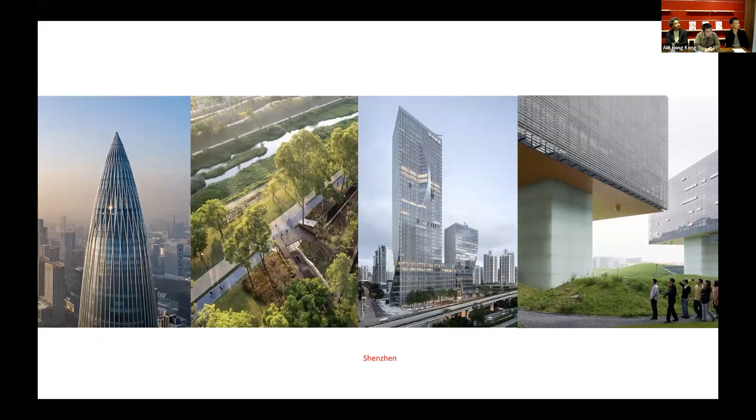However, as a very young practice, it's really hard to get those kind of high-profile projects. So we have to start from very small things: temporary structures, installations. So to prepare the lecture tonight, I put together all the projects we have completed or have in construction.

So relatively small, from very small to small. And I put them in a chronological order. It's not necessarily the case that what we are doing currently is bigger than what we were doing in the first place.

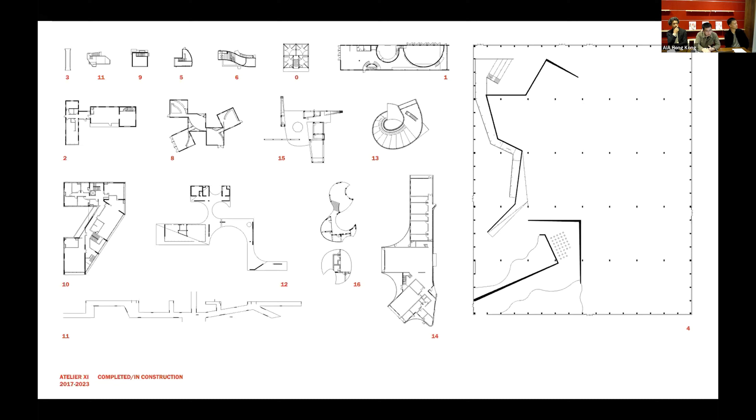I'm very grateful for this opportunity to start thinking about the hidden connection between different projects. So the first stage in Shenzhen, we started with some exhibition installations and temporary structures, thanks to the Biennale of Shenzhen, which gave us a few opportunities. I think it's still a great opportunity for young designers to start with.

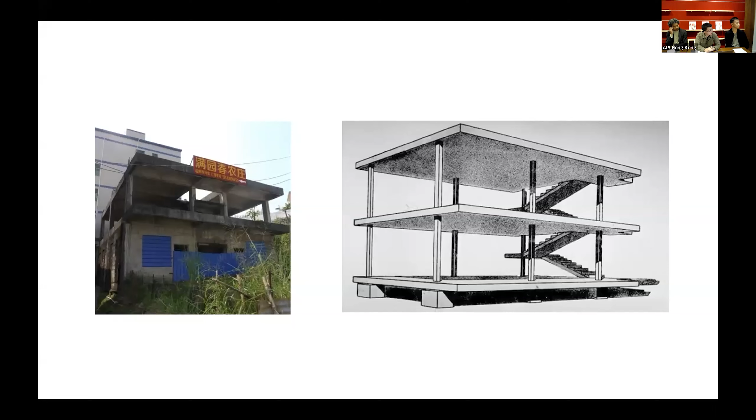The first one I'll start with is the Domino Pavilion for UABB 2017. At the time, I was full-time teaching in Shenzhen University, so it's a collaboration with Shenzhen U. The commission was to renovate a rural village house into a Biennale exhibition venue. When we went to the site, it reminded us a lot of Le Corbusier's Domino prototype. So the first idea was to retrieve the modernist prototype by taking out extra partition walls. The second idea is we wanted to add a layer of intervention by adding pivoting doors, each by the column.

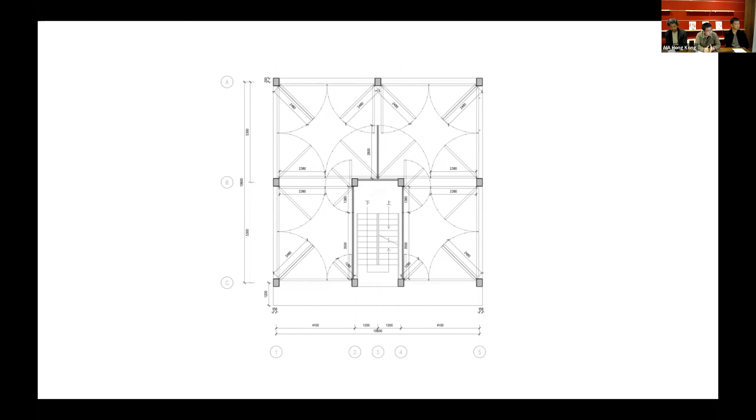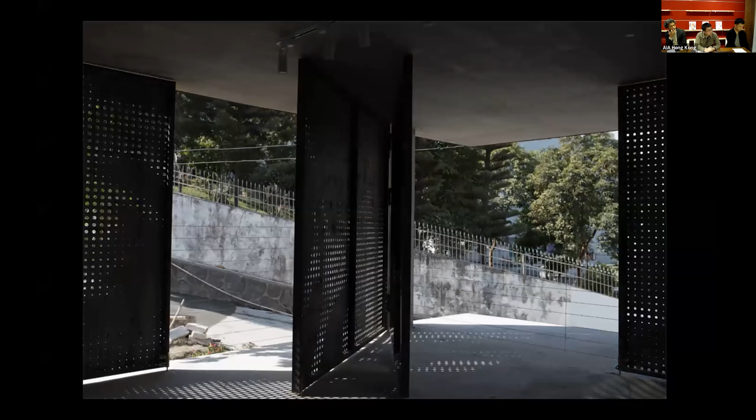In this way, the space gets flexible use depending on the status of the rotating doors. We translated that concept model into architectural drawing. Altogether for this two-story building, we have 30 big rotating doors, and they can be fully closed as a pavilion, but they can also be fully opened as a public space. This is how people experience the building - it can close and open, and the interior space can transform into something semi-exterior in this way. We also put perforation holes on the facade to let air and ventilation pass through.

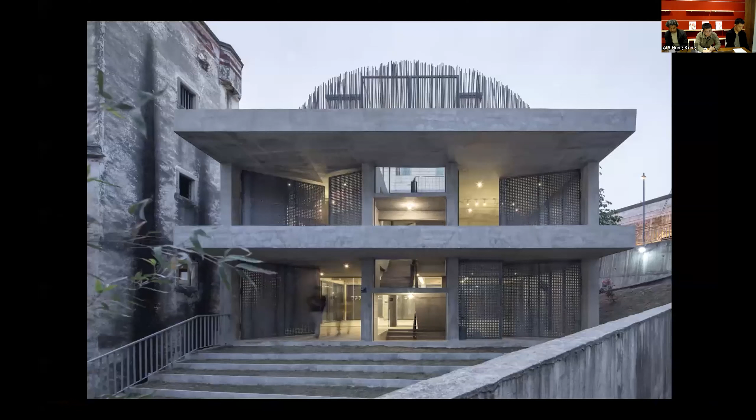At that moment, I think it was a pedagogical project for myself, because previously I never thought about opening my own company and doing practice on my own. I thought opening a company meant you needed wealthy clients, a lot of resources, and a full house of consultants and professionals. But here, there's this informal area where you can bring your idea to the local residents and work directly with contractors and workers. There's a big room for design experiment to happen.

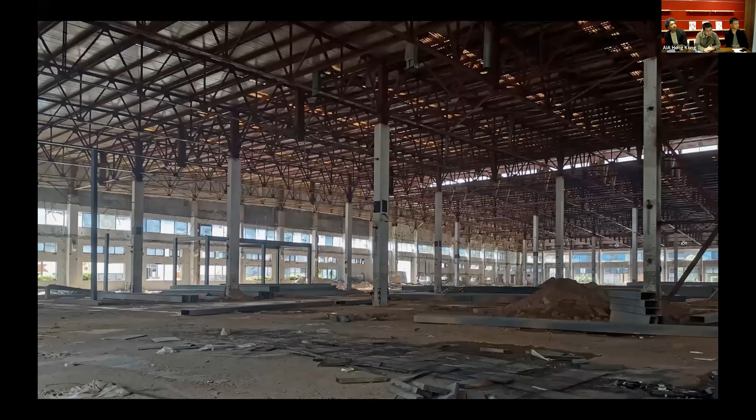So actually, I was lucky to have a sequence of exhibition projects. One was commissioned by the same client who commissioned the Domino House, two years later for UABB 2019. This time the client said we have a bigger venue - that's the good news, but the bad news is we only have two months ahead. So how can you transform this big abandoned factory of 10,000 square meters into an exhibition venue in two months?

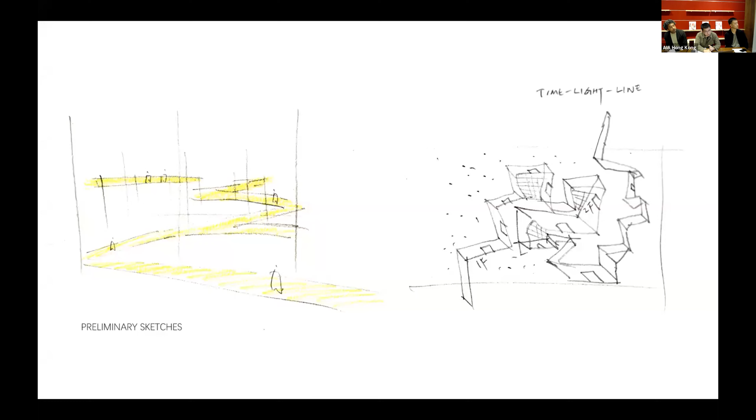We were very impressed by the existing structure, this rigid truss and column system. So we wanted to keep the existing structure as much as possible and put a layer of intervention as light as possible. The lightest medium we thought of was light itself. So we proposed a 250-meter-long light-filled wall to reshape this industrial space and give a chronological sequence for the exhibition to happen.

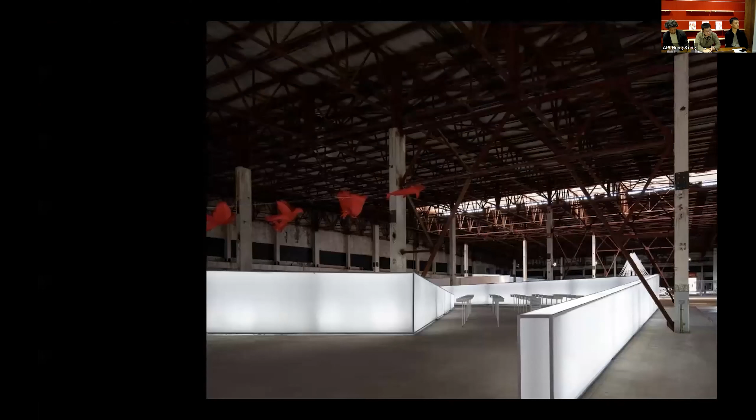In the end, it only took 20 days to finish construction - we were ahead of time. We called it the folded time light line. This light-filled membrane wall serves as a kind of foreground in this heavy industrial factory, but it also becomes the backdrop, the background, for a lot of exhibitions and artwork to happen.

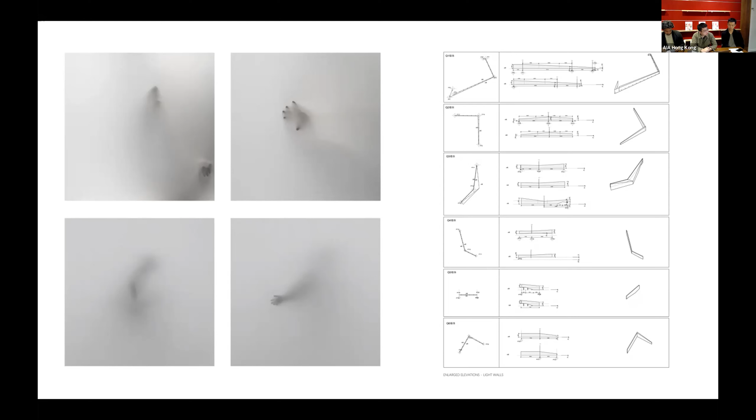So the challenge was how we could do the construction. We used a key material that's very foldable - the membrane wall can stretch 50 meters long with no seam, and labor with no professional skills can do the construction fairly easily. We're very happy this project not only fulfilled the client's requirements but established a dialogue between the existing heavy framework and the newly added light structure. We think this dialogue is precious and influential to some of our later works.

So the next stage, we started to have a few new constructions. In the beginning, it wasn't in Shenzhen, and later we came back with some experience from the rural villages. The first stop we came to was Xiuwu, in central China, and the first commission was to do a 300 square meter building for the county to facilitate the county's culture and art education.

I have to thank the party official, the very young mayor of this county, who actually had a PhD degree in politics from Boston University - very bright and very ambitious about how architecture can change local art and culture education. He showed me about 10 different sites and asked me which one would be better to do this building and have the biggest impact on society.

It's really difficult to choose because each one is different. Some are up in the mountain, some in the flower field, and the locations are far away from each other, so local residents aren't able to easily get to one point. So I proposed, can we break the design brief into several small pavilions that can better serve the local community?

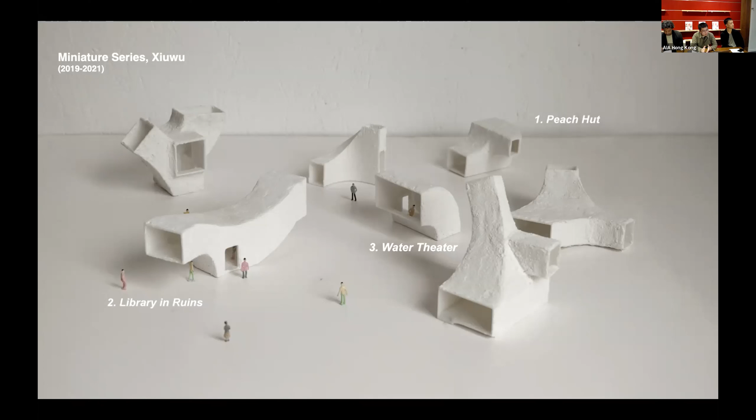Eventually we decided on 7 different pieces, developed in 2 phases. In the first phase we have the peach hut, library in ruins, and water theater, and in the second phase we'll wait for further funds to come.

In the very beginning, I wanted these buildings to be different from what the villagers see in their daily life, because I think inspiring architecture can help them rethink their local environment and space. So we designed these tree-like buildings with tentacles rising to the sky, framing the beautiful surrounding landscape, each with a different gesture relating to its surroundings.

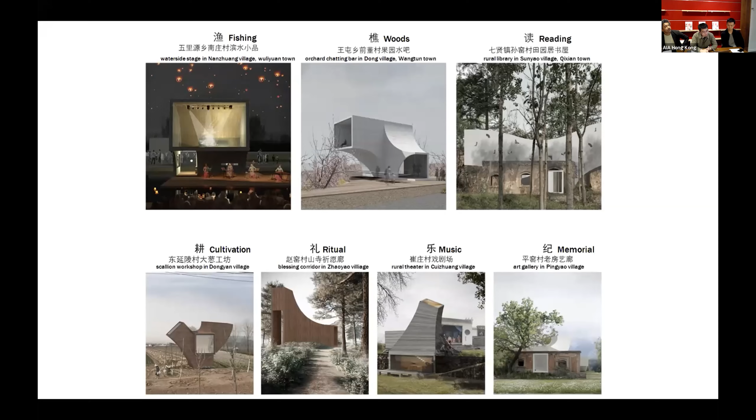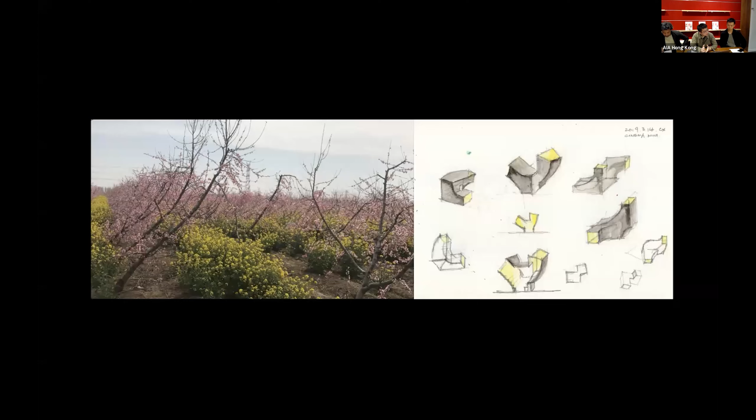The first completed one is the peach hut, located in a big peach tree farmland. The reason we chose this shape and color is that during the first site visit, I was impressed by the full peach blossoms, and it was interesting that all the trees were leaning toward one side. So we thought maybe we could design a building that rises toward the sky on one side.

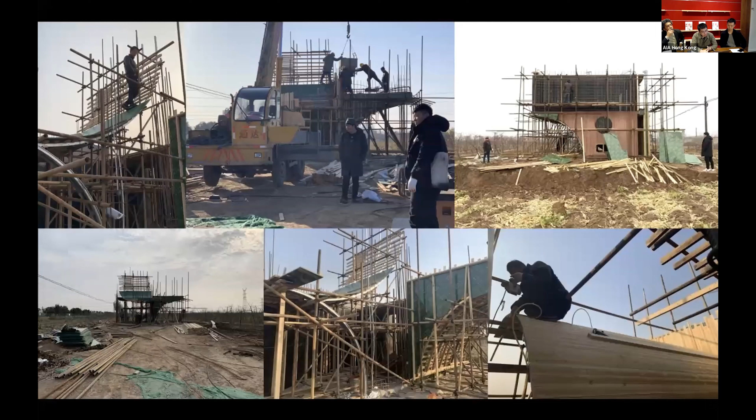After a careful study of the geometry, we developed a scheme where the building is cut through by a sequence of invisible arcs. We were quite worried the local contractor couldn't achieve this geometry well, but they managed to do it pretty well using small board-form concrete.

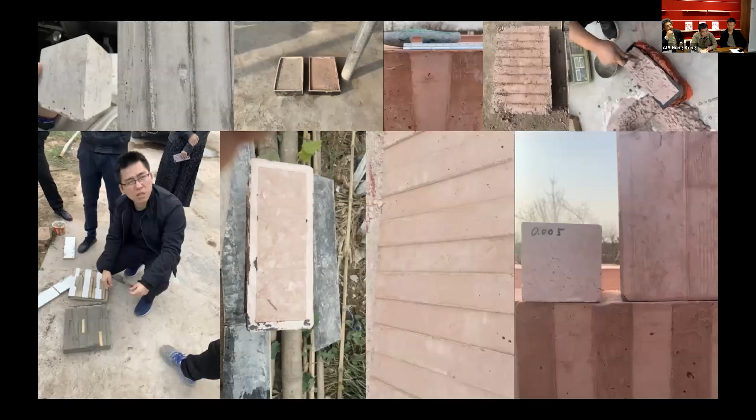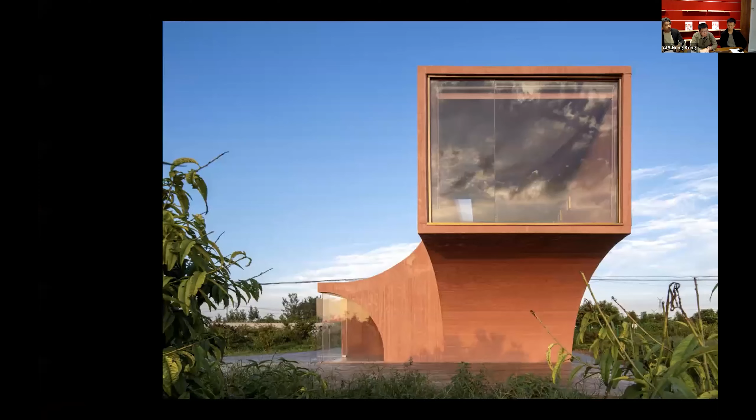Another idea was to use this pink color in memory of our first site visit. This was a pretty hard one, so we sent an architect to live there and do all the mock-ups with the team for about 4 weeks. In the end, we got the desired color and strength we wanted. That's the outcome of the construction.

The pink color of the building actually changes during the day. In the afternoon it has a warm light hue, and later in the evening it starts to have a cooler color and becomes purplish.

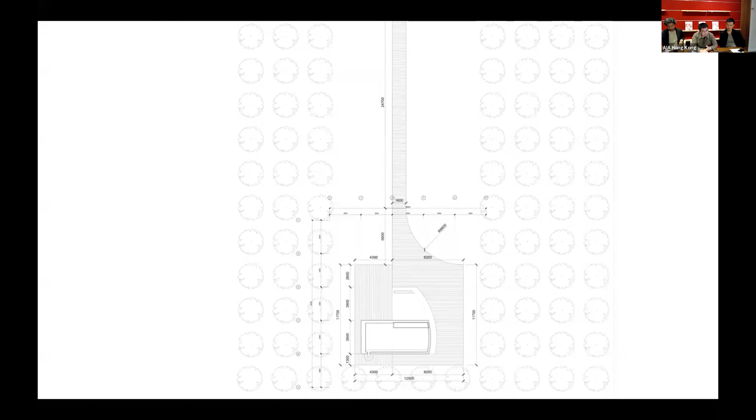We prepared a long pathway for visitors so they can go through the tree farm, with the peach hut at the end. The wooden pathway becomes wider for villager gatherings and small activities. In the end, we realized the arcade is the place they like most—they have peach tasting events and kids playing around under the arcade.

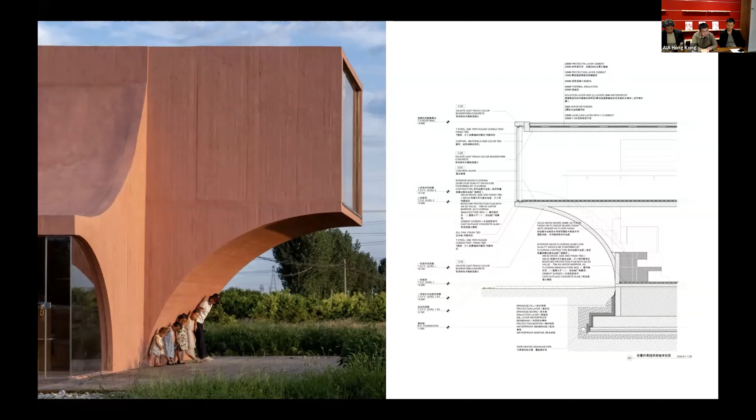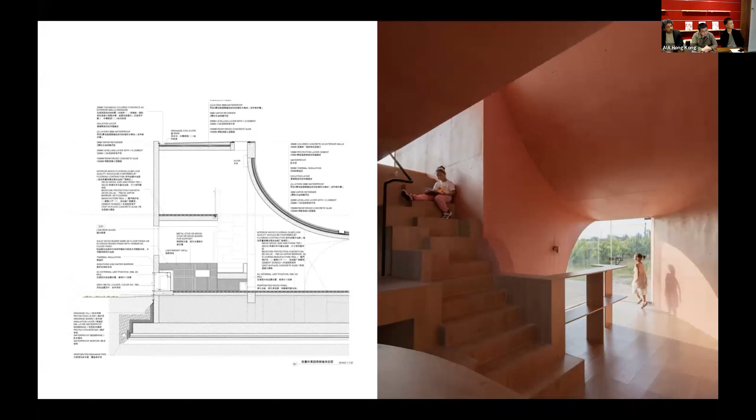Another thing is we tried to design this building with windows in different shapes, which I think can help local kids broaden their imagination. For example, the window near the entrance has a quarter-circle shape, framing the peach farm, since our trees have this stoop shape—so they share that kind of relationship.

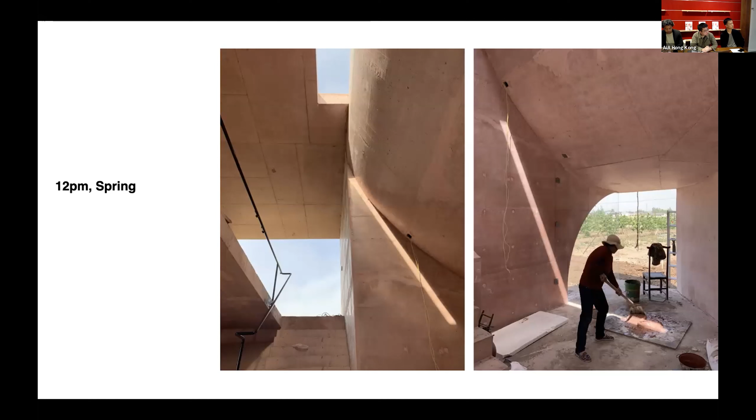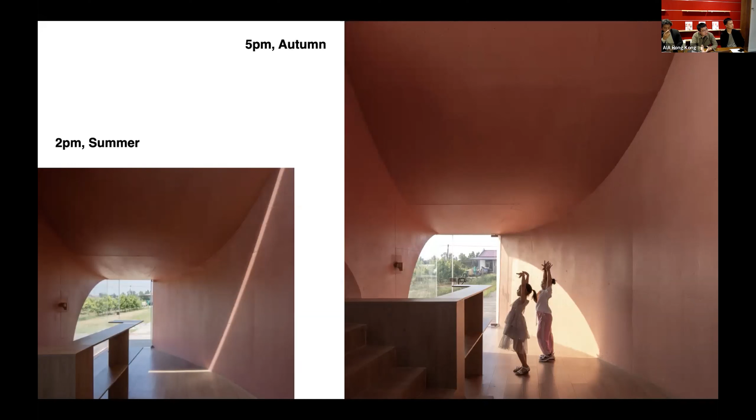There's another skylight we saw during construction on a spring day, but later in summer and autumn when we visited, that skylight effect no longer existed. So the light kept changing across different seasons and throughout the day.

Inside, it's a small space that we wanted to be multifunctional. It has a small reception area, step seating for reading or small gatherings, and on the second level there's a big window where you can look down and enjoy the landscape view.

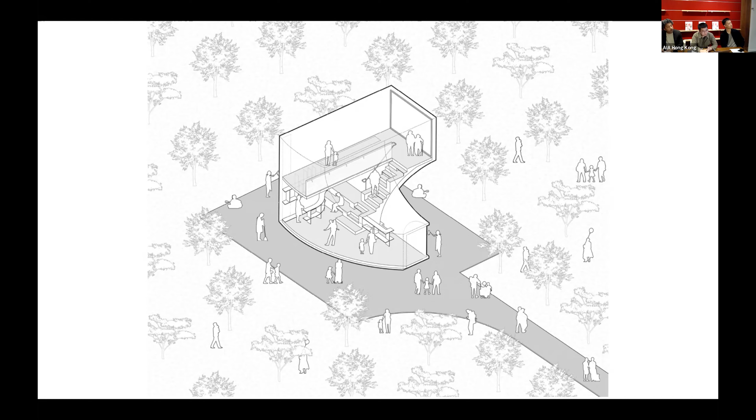We intentionally made the exterior concrete with small board form to have this rough texture relating to the outdoor rural landscape. And for the indoor, we cast it with smooth formwork, so it can better reflect the light.

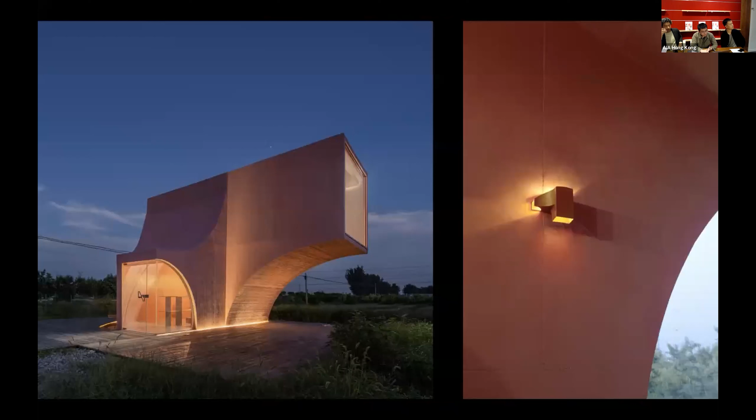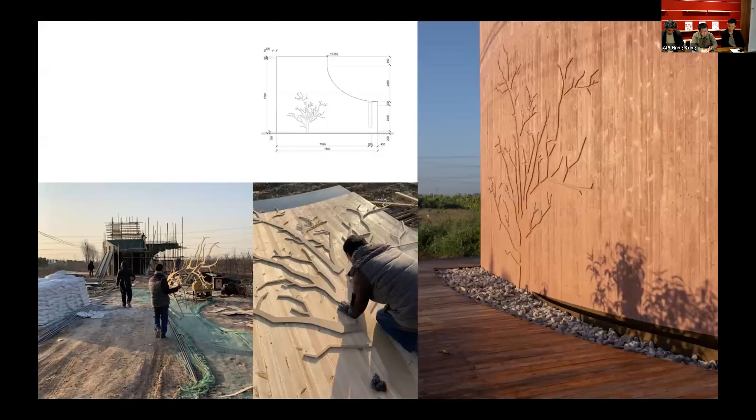And that's how it lit up at night. We tried a few things, and we want to leave marks to the building that only belong to this site. For example, we designed this bronze wall sconce on the wall that's kind of mimicking the shape of the building. And towards the east, we cast a kind of tree relief, so that will face the sunrise every day in the morning.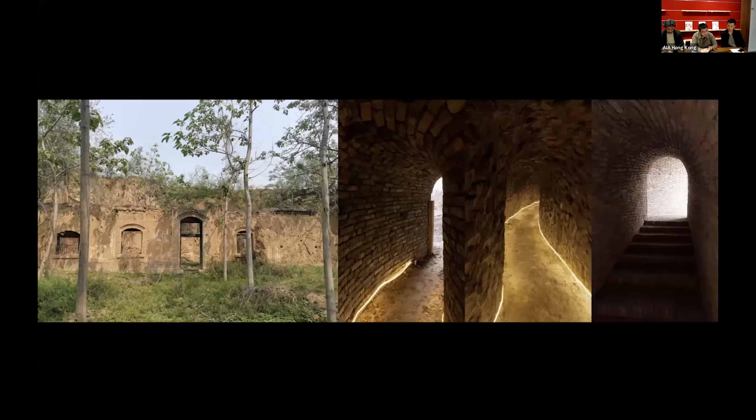So the first building was accepted quite well. So later we had the second one. It's in the same county, but in a very different landscape. It's a village near the mountain. Actually, all villagers were moved from their old village built in rammed earth to their centralized new village of concrete.

So it's kind of a pity that they have this beautiful old village, large vegetation that's abandoned, and nobody wants to touch it. So the villagers came to us, thinking we could renovate this place as their communal library. But we talked to local workers, and nobody can do the rammed earth or this kind of adobe wall anymore. Instead, after so many years of urbanization, people do concrete really well.

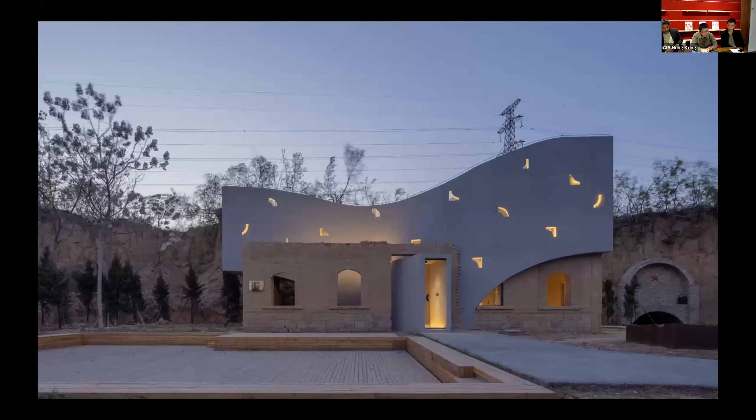So in the end, we proposed, okay, maybe let's do a concrete one, kind of like a sculptural shape that's inserted into the old ruin. So the new building can become a device that people enter the ruin and become kind of a platform that they can view the landscape and have a relaxation time.

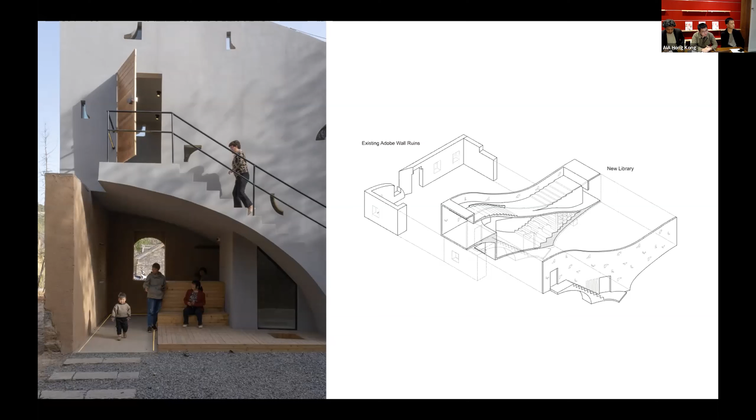So in this one, we really hope to present this intertwined memories. On one hand, the new building as an added concrete piece grows from the existing ruin. On the other hand, we collect a lot of old artifacts, like this traditional wooden door. We put it on the new building. So this kind of constantly reminds visitors about this dialogue between the past and the present.

So this is the interior. So the interior, as a communal library, can also serve as a screening place.

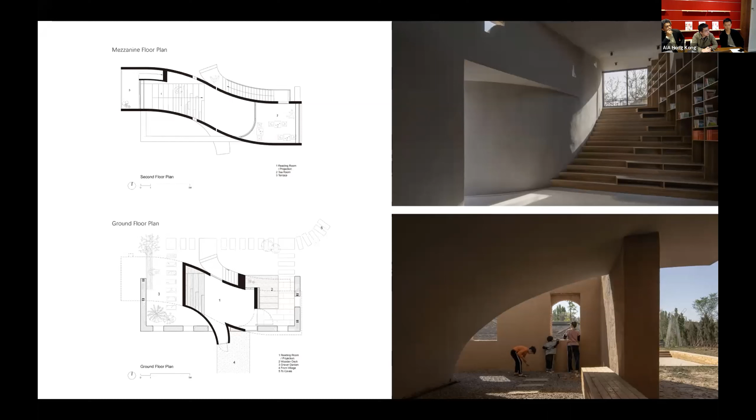They have this bigger window facing the east and west to let the sun shine in, and it sets up this kind of topographical relationship with the surrounding barren cliffs. And the meandering plan, the meandering space of the library, and the newly added landscape paths actually become part of this network of public spaces in the old village.

So we even added one plaza in front of the building to have more of this kind of communal gathering for them.

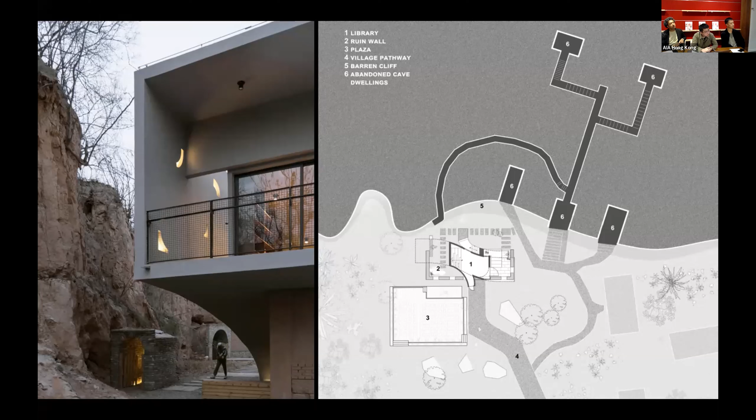So once you get up to the roof, you can see a totally different landscape that's up on the barren cliffs. And on the roof, it's a terrace with a slide and some stepped seating.

So during the daytime, this kind of sculptural piece looks a little bit dull, showing kind of a solidity. But at night, when the light shines, all the irregular openings, irregular windows will have this twinkling light and actually activate the public space outside.

So the experiment of the miniature series continues. On one hand, we are still working on the third one, a water theater for the society in the same county. On the other hand, some of the formal language and the spatial experiments we carried to other places and developed further.

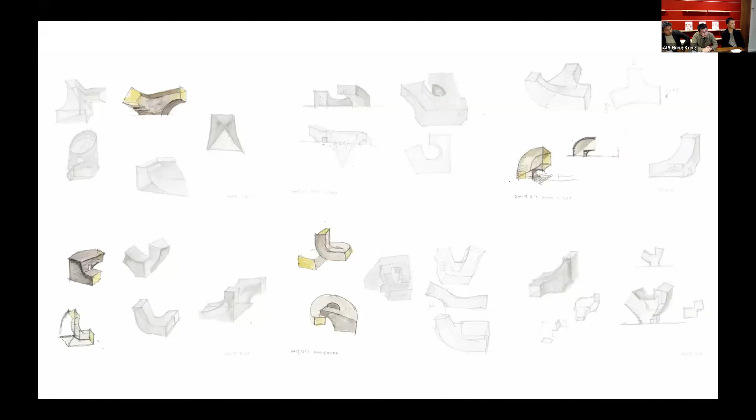Like this one was the latest project we completed in Shenzhen, next to this Dasha River Park, which was originally designed by AECOM. Looking at the city with very dense residential buildings and office towers in the far distance, the city decided to provide a few public facilities in the park.

Our idea is to use as little land as possible and to have this spiral geometry come up. Actually, local people call this one a tree house because they like enjoying the view on the second floor terrace and touching the trees.

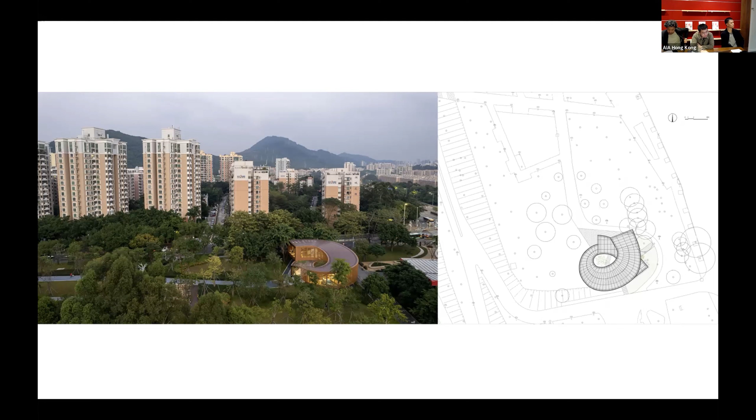So we try to keep the ground floor as small as possible, leaving room for the vegetation and landscape to grow. Only necessary programs were left on the ground, like the public toilets that can be accessed, and also the counter space for the book cafe.

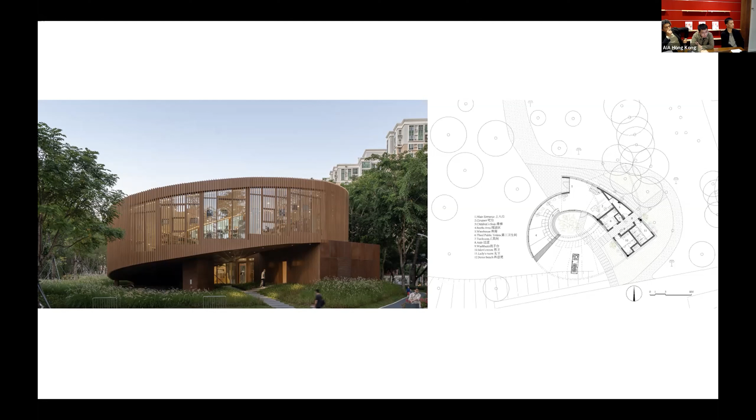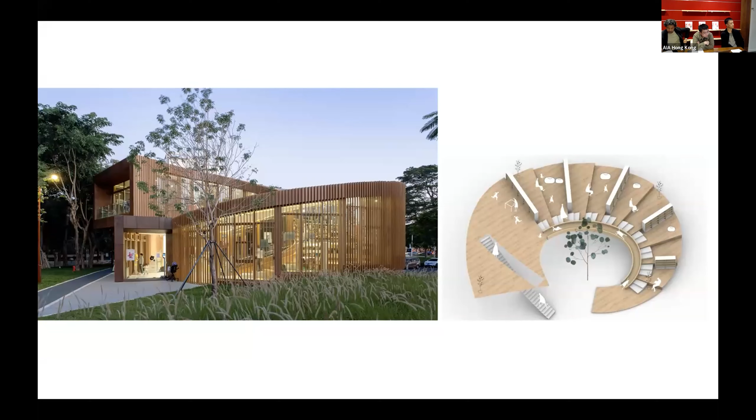So the interior follows the geometry of the exterior shell, becoming a stepped reading room. And because there's a big playground for kids next door, this library seemed suited for kids. We even had a slide in the middle. So that's how people use it.

The kids love it too much. So actually, the operator nowadays keeps only certain hours for kids to play.

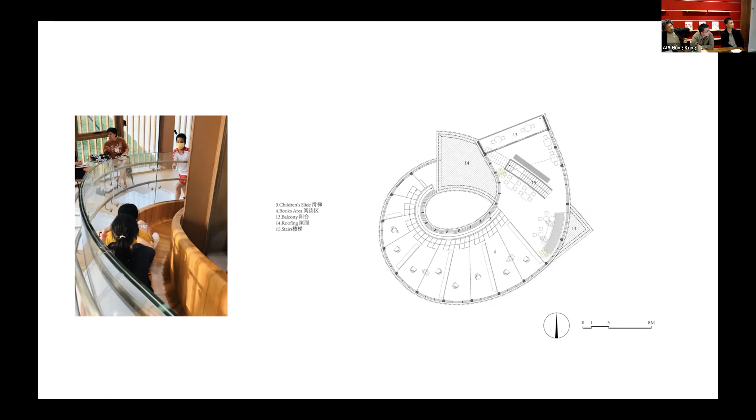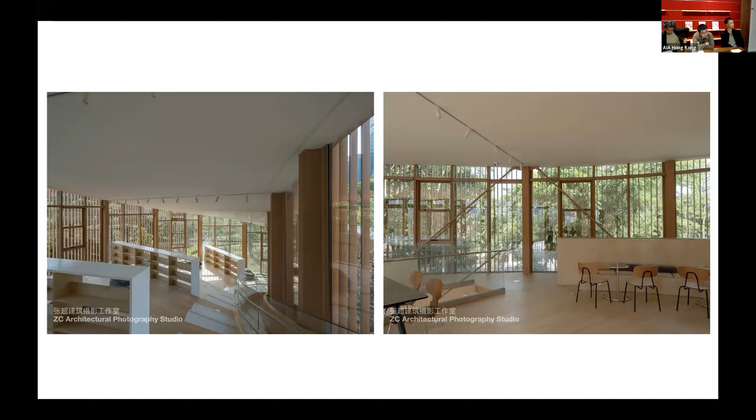And inside the book cafe, you see all green surrounding you. We added this vertical fence because it's too hot in summer, especially since the building faces southwest with no big trees ahead of it. So it helps with shading a little bit.

And this is what we searched on the internet and found—this recent status shows it's used a lot by kids and for communal activities.

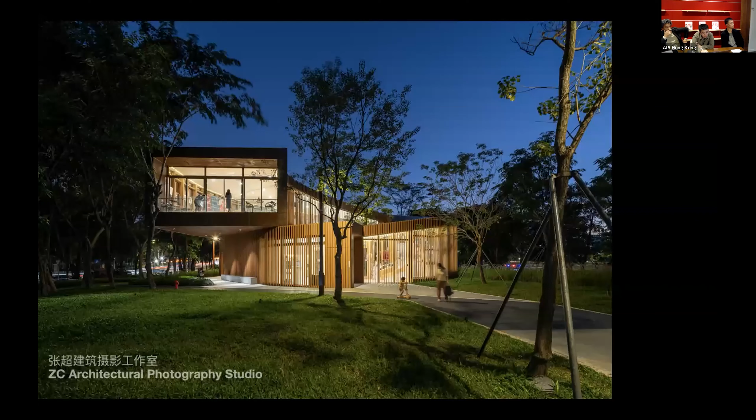Some similar project we did, also in Shenzhen, going back to this idea of continuity of movement and this dialogue with the surrounding landscape. This is a tourist center for a park named Cloud Park.

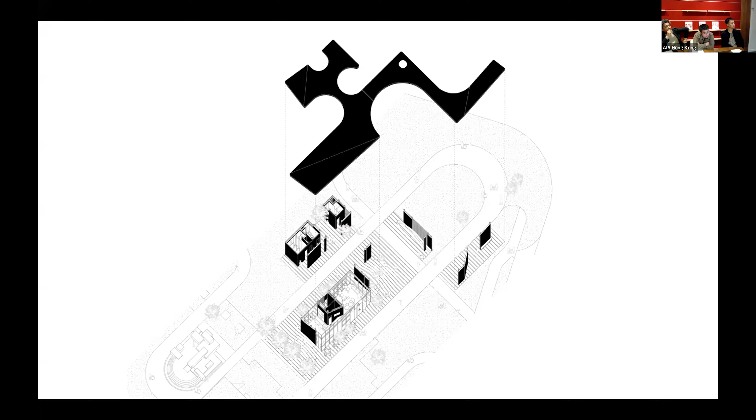Originally, we were requested to do public toilets and a book cafe separately, and also a gate for the park. We decided to have this continuous canopy connecting them and forming a bigger public space.

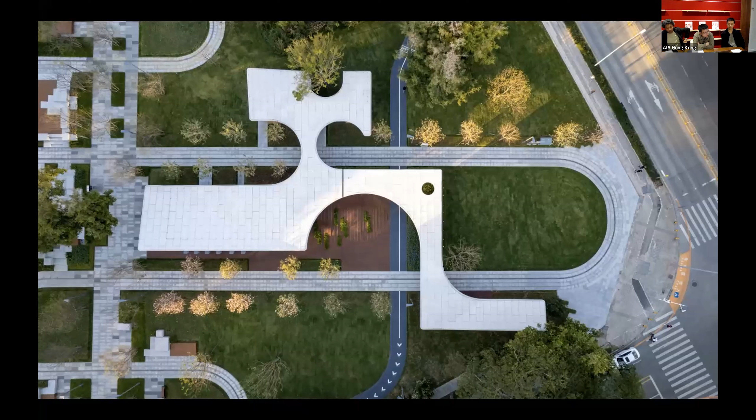So the ground will be more porous to the landscape, and on top it's connected. So it will serve as a roofscape for all the high rises around it, not only providing shelter from rain and sunlight underneath this canopy.

We also use these curves to frame the surrounding views — sometimes the tree, sometimes the cloud, sometimes the cityscape — and some playful landscape undulating with the building. We really think the architecture and landscape should be integrated together, and also the interiors.

So we have the ceiling continuous, flowing from interior to exterior, and have this very direct connection with the landscape.

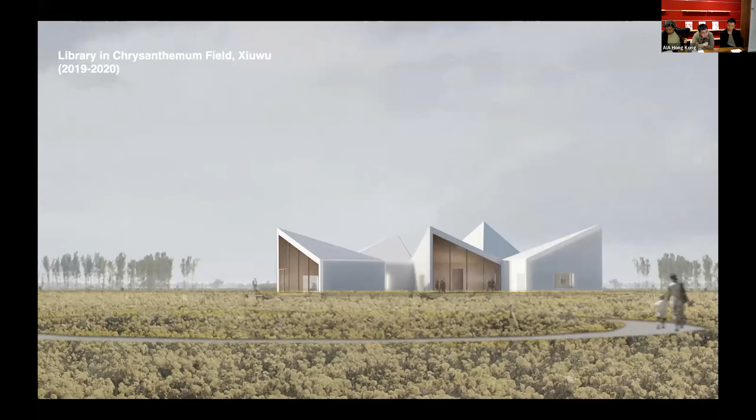But we think building it as a single volume might be detrimental to the surrounding landscape. So we decided to break it into 5 different rooms, each facing a different landscape toward a different side.

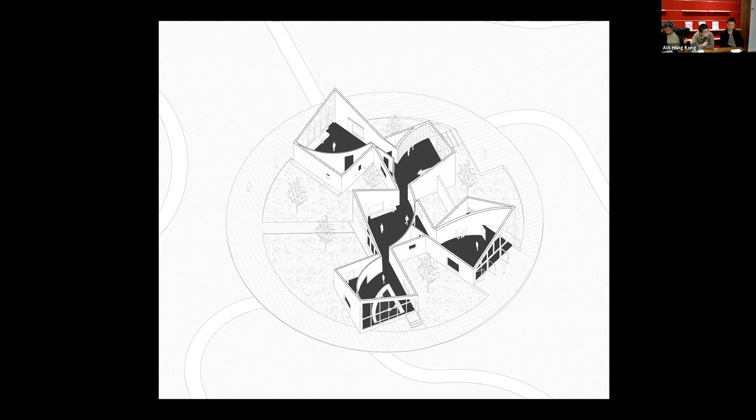It's very simple, with these straight lines and cubical forms, much like local villagers' houses. But inside we bring these curves and build with wood in warm color, so it has this soft touch to people inside.

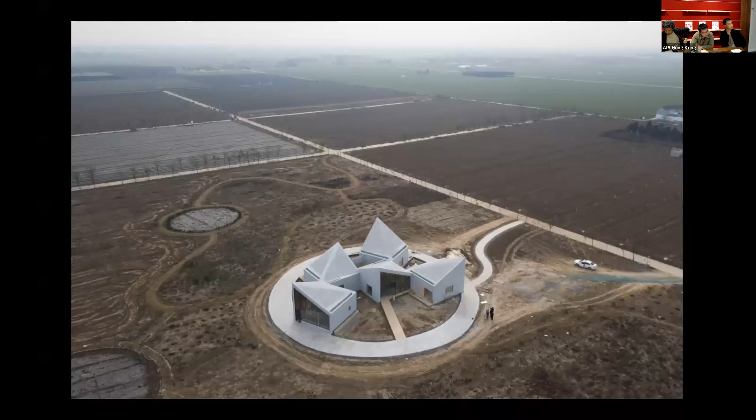This is when it's in construction. Everything we see on the screen will be in flower I think from October to December.

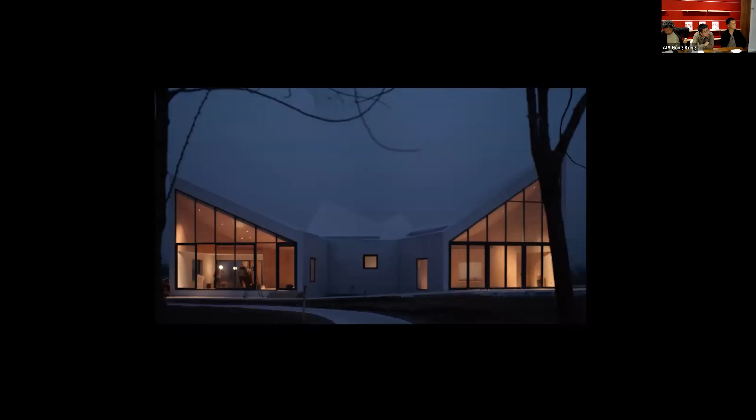And in every room we have this very intimate visual connection with the landscape. At night, the soft curve of the interior will show up amid the sharp lines of the building shell.

But unfortunately, after its completion, we never got to travel to this place because of the COVID shutdown. We really hope this year we can go visit the building during the flower season.

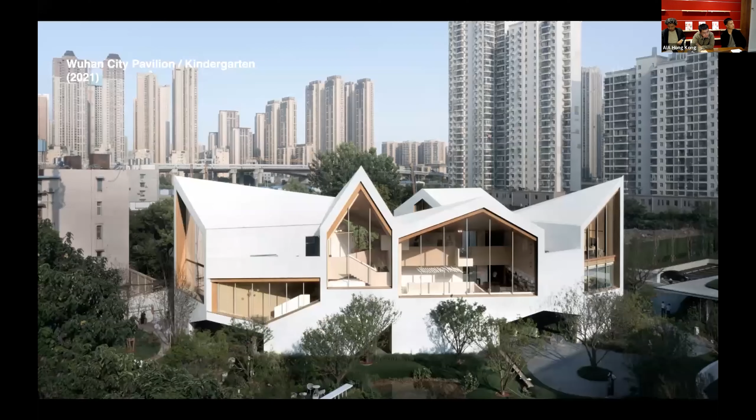So some of the ideas that we developed in the rural area at a smaller scale actually evolved and transformed into something bigger that we did in the city.

The idea of the flower pavilion was later translated in a more vertical way in the Wuhan City Pavilion Kindergarten, in the very middle of the city with high-rises all around it.

Actually it's right by the Huanan seafood market where COVID first broke out. We got this commission in 2019, and it was suspended for a year — we thought it must kill this project. But thanks to the great effort of the local client and construction team, it's finished in 2021.

The challenge of this project is we were required to do one structural shell that can fit 2 different programs. In the first 2 years, it will serve as a sales pavilion, and later it will transform into a 6-class kindergarten — very different program, very different regulatory requirement, and very different relation with the landscape and circulation.

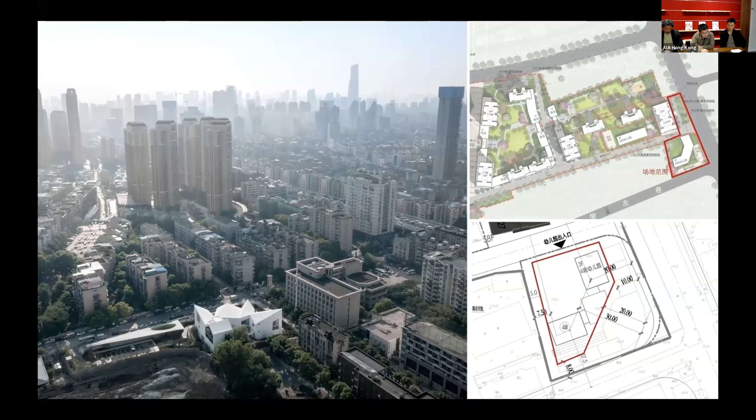The breakthrough happened when we studied the 2 sets of design briefs carefully, and we found the program can be broken into smaller compartments that share similar sizes.

For example, the classroom in the kindergarten has a unit of 120 square meters, which is more or less similar to the model apartment they want to show in the sales pavilion. So by breaking the building into smaller units, each unit can transform from one function to another over time.

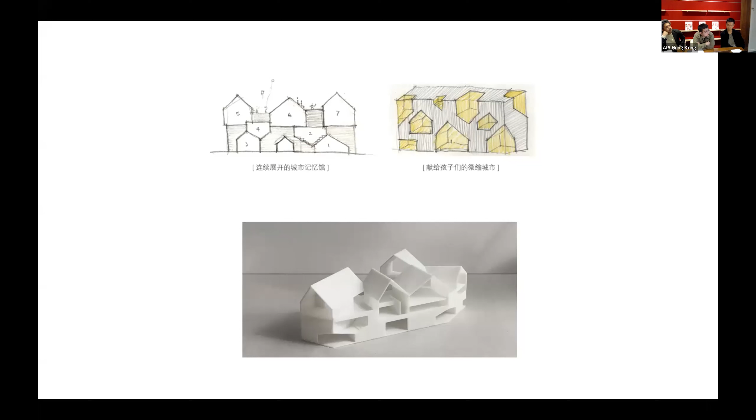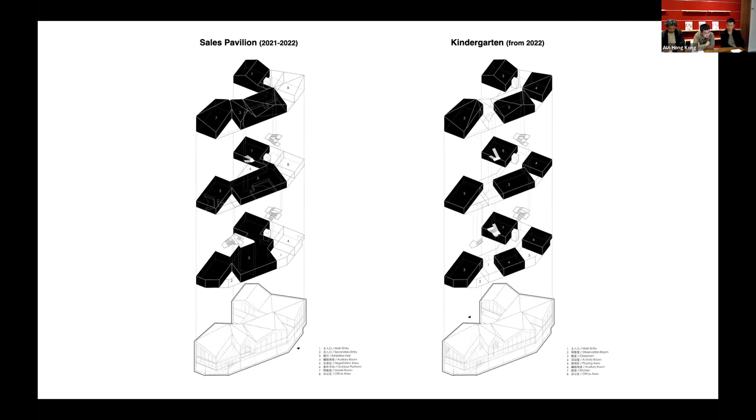This is the first sketch and our study model in the beginning. We were thinking to put those compartments vertically and stack them as a playful, spatially interconnected structure for kids, which could also serve as showrooms for the developer to sell apartments — that's how the building can fit 2 different types of function at different times.

And that's how we completed the first phase for the sales pavilion. So really, we think of this building internally as connected voids, with each void serving as a classroom or a model apartment, and the exterior shell just follows the interior space. In this way, the structure, the architectural expression, and the interior space are all integrated into one.

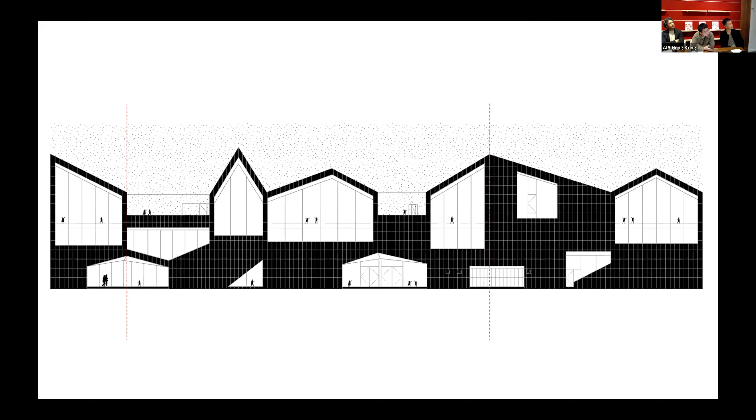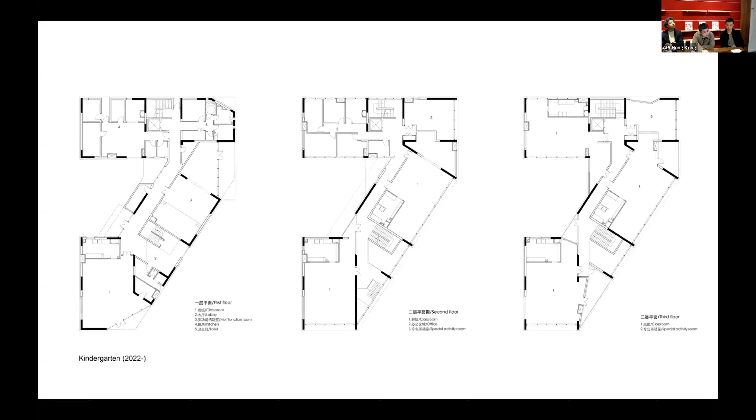A few small adjustments needed to be made after 2 years. For example, the big curtain wall, like this one, had to be revised to have more operable windows for kindergarten use. So that's 2 sets of plans we did for this building: one for the kindergarten later, and this one for the sales pavilion in the beginning.

We also challenged the traditional model of the sales pavilion as an enclosed, over-decorated interior space, and wanted to show the space as a powerful expression to the city. Each room can become more or less like an ideal house for people to imagine their future living.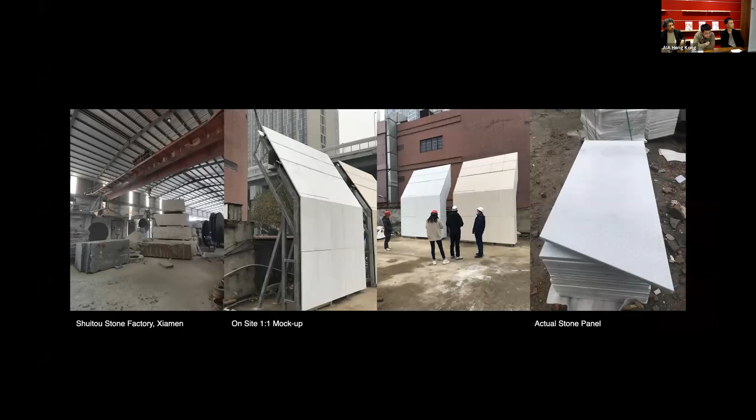It was difficult to decide what kind of material to use for this building. Eventually we decided on white marble and white granite stone that could work for both the kindergarten and the sales pavilion. So through about half a year of research, mock-ups, and actual cladding of the facade, large pieces of stone were installed during construction. This is how it opened to the public.

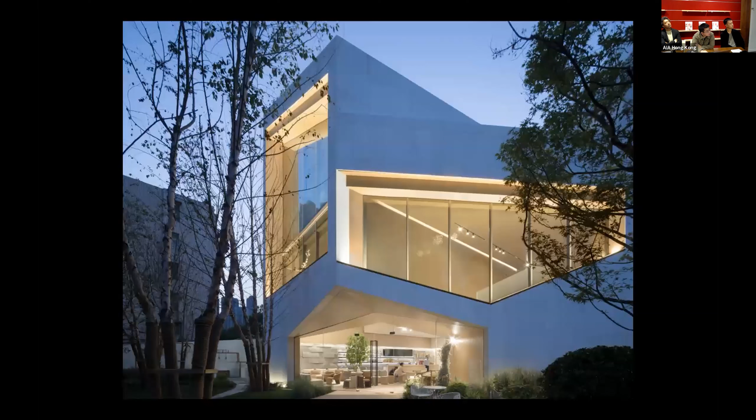A few of these shapes serve as spaces, and some serve as staircases for people to circulate around the building.

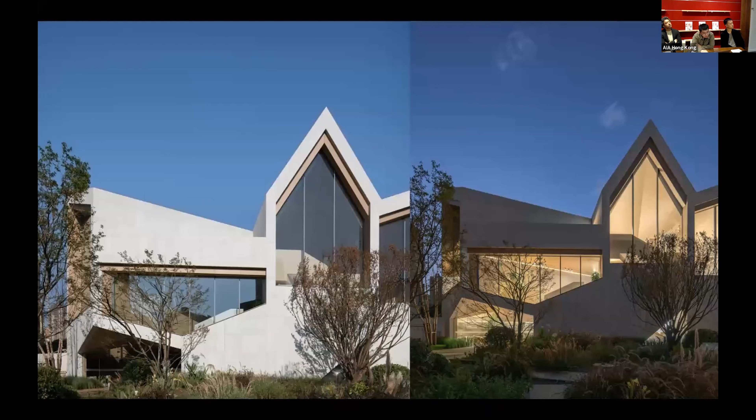Again, we have this kind of conversion, maybe contrast. During the daytime it shows as a white sculptural skeleton, and at night the skeleton fades away, with all the space showing up as its expression.

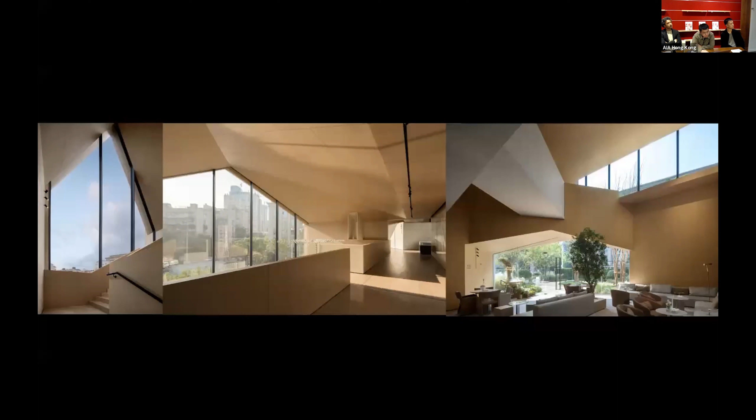Looking through the big windows in different shapes, there are different kinds of visual connection with the cityscape and the surrounding landscape.

It's interesting that it sits in the middle of traditional residential housing and newly built high-rises, becoming like a fairy tale kindergarten later for the local residents.

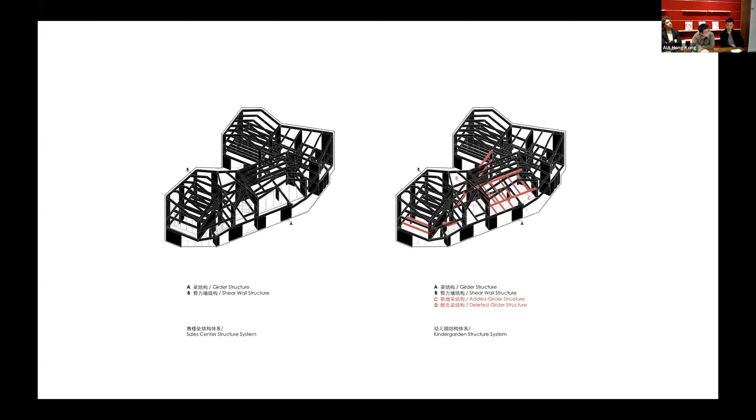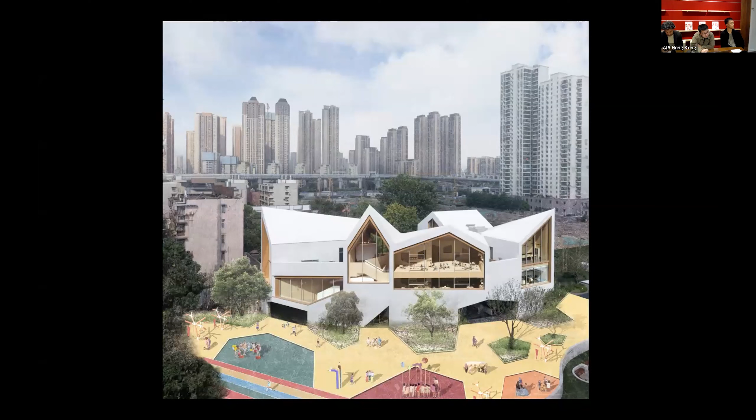This is the preset structural measurement we're going to introduce later this year, adding 2 slabs to hold more classrooms for later use. So that's the current status, and later it will become like this—a more playful landscape with a few more slabs for classrooms to carry.

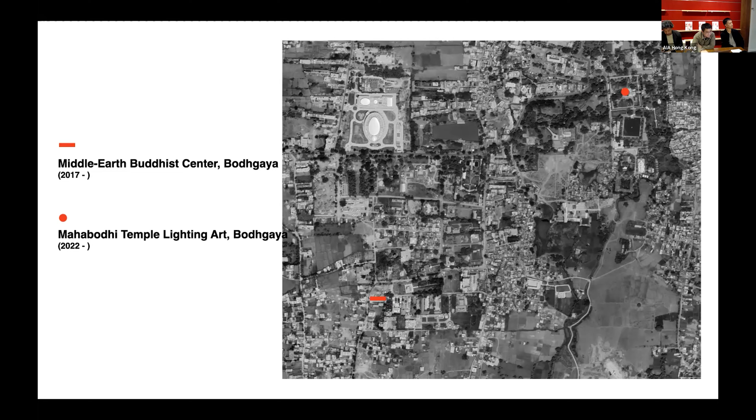At the end of the talk, I'm going to briefly introduce 2 important projects we're working on right now. They're both happening in Bodhgaya, India, kind of far away from where we are. One project is the Mahabodhi Temple lighting design.

We won the international design competition to do the art installation for the sacred temple inside this UNESCO heritage site. It's also a Buddhist holy site—it is said the Buddha got enlightenment under the Bodhi tree in this temple. We really think this is greatly connected with the spiritual experience.

We started the concept with a spatial mandala, a traditional Tibetan painting that depicts the universe in different layers of circles or squares. So the space with lighting will be provided through a sequence of changing colors and shapes.

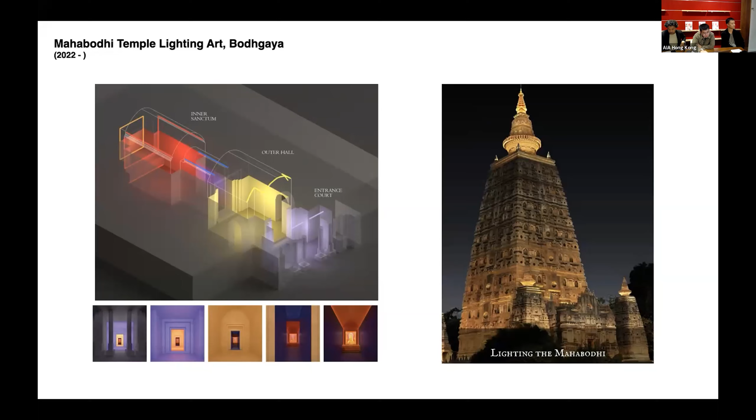So that's my sharing for today, and thanks.

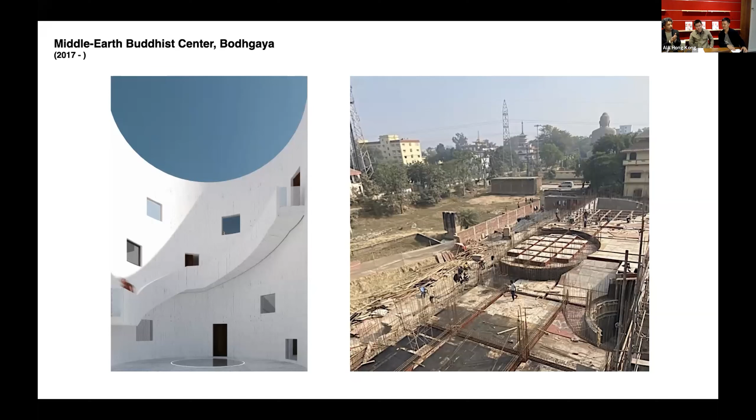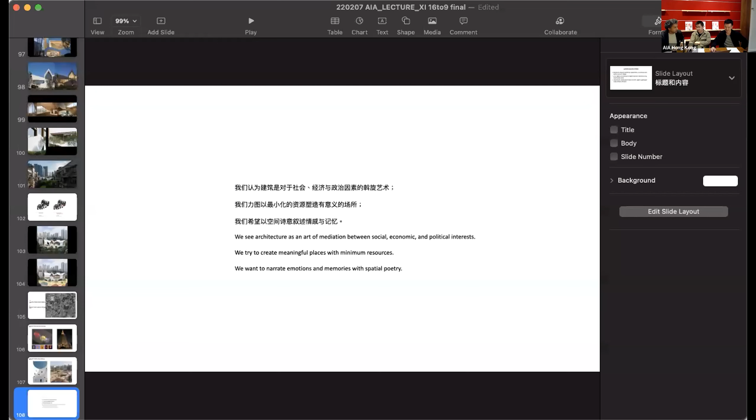All right, I'll start by saying thank you as well. It was quite enjoyable. You started by saying that you are a young practice, using the word 'infant stage,' but looking at the spectrum of your projects, you seem to have been quite prolific in a way.

And in addition, I also see a kind of continuity in the language of the projects, which I think is something that for most practicing architects can be quite challenging. Once you achieve it, you might make it look effortless, but I think it's quite difficult. I wonder if you'd like to shed some light on the challenges of retaining a consistent language, and I use that word loosely - it has to do with scale, quality, geometry, and playfulness.

Okay, thanks for your generous comment. Actually, especially during the first three years, I felt every project was a big challenge, and we were thinking we have to come up with some new idea.

But later, when I look back, I think maybe that's not new - that's just something developed from the previous project. So this kind of hidden connection is inevitable, but at that time we thought it was a brand new idea. It's really not something we intended - we have to keep the clue of the last one, but it's kind of a coincidental result, I feel.